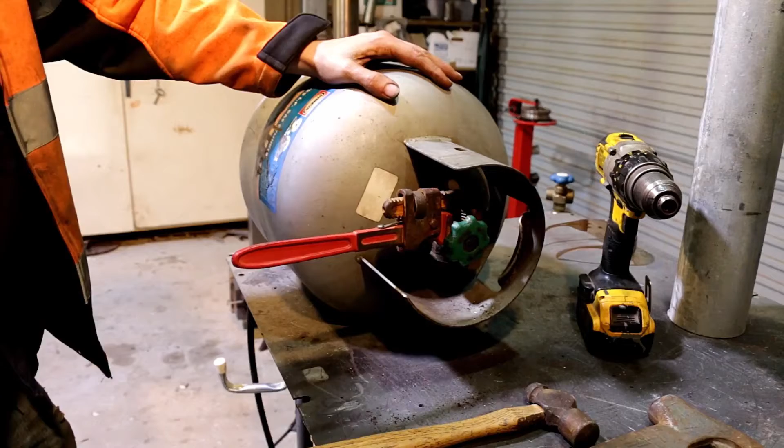Anyone would think they were going for like a gas-tight seal or something, eh? Like a glove. Anyway. Oh folks, it's not looking good. Actually. So if at first you don't succeed, destroy all evidence you ever tried.

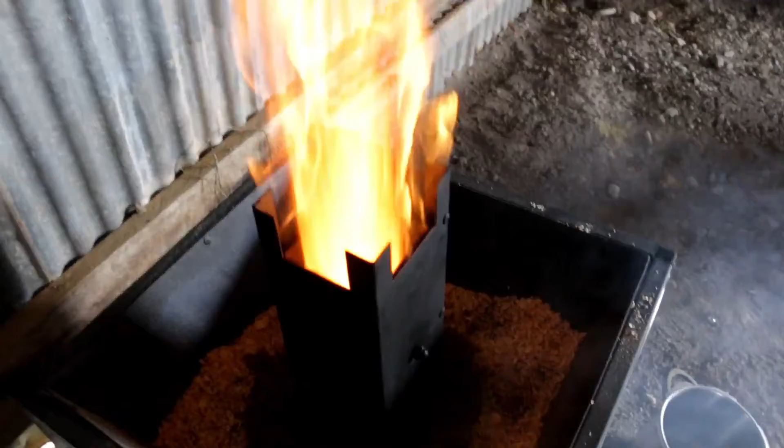Hi. So I have an interesting challenge ahead. Challenge for me because I really want to weld, and I'm putting a restriction on myself that I can't. Basically to put myself in the shoes of people out there who don't have access to a welder or simply haven't learnt the skill yet.

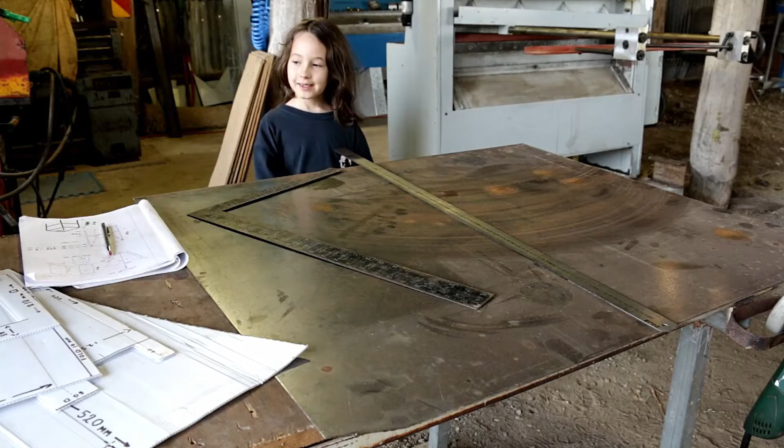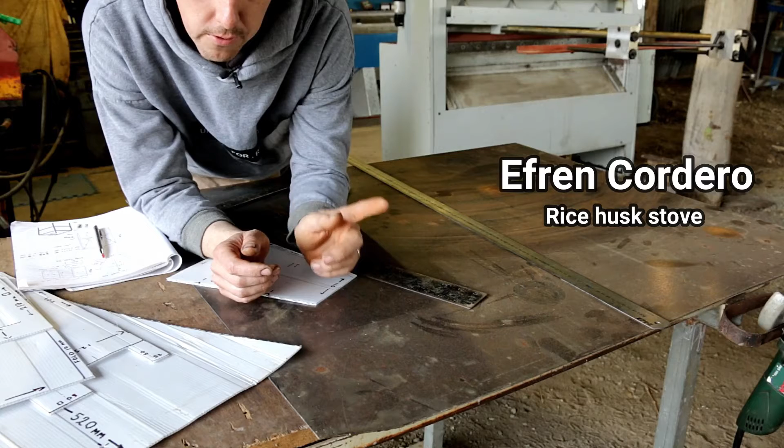So what I have, so I've drawn something up in the computer, and I cannot take any credit at all for this design because it's actually, let's turn this around so I can see what I'm looking at. This design was made by another bloke on YouTube whose name I cannot remember off the top of my head, but I'll put his name there. So check this guy out. He's the original bloke who made this stove.

When I sort of had a first crack at this and fell flat on my face, I'm like, okay, let's go out there and see what works. And so I came across this design, and I really like it because I think I'll be able to not just burn rice husk in it, because rice husk for me in Australia is basically a non-event. It's not something that I can find readily available, and I think that's the case for most Australians.

But something that is available is other forms of biomass, like sawdust. I'm going to try burning sawdust in it. If I can get my hands on some wheat husk, I'd love to see if that would burn in it. But anyway, so a huge part of this build are these templates.

What a template allows you to do is to basically build something before you've built it. See how it fits together, make adjustments, because it's a lot easier to work with this, and less expensive than to go cutting this up and wasting it.

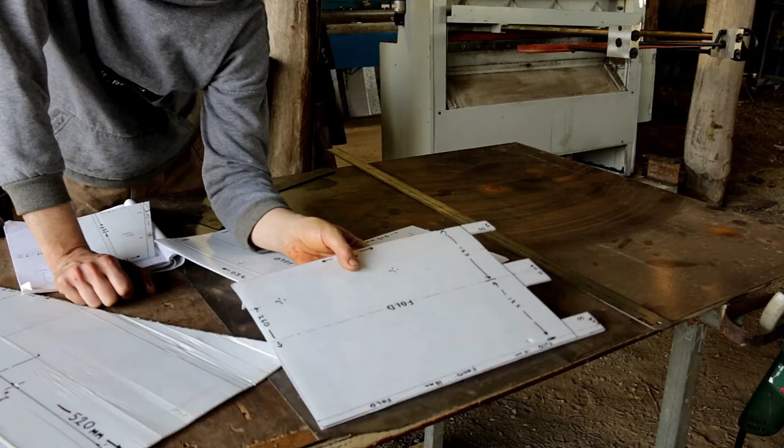So the idea of a good template is it gives you a better feel for your layout and your material use. So I can lay all my pieces out on this piece of steel and get the maximum usage out of it. It also means that it's repeatable, and if you want to make more than one, you've already done the hard work and you can come back to it. There's nothing stopping a person from scratching out these dimensions straight onto your steel. That's fine. But if you ever wanted to do it again, it's worth making a template.

I've used Corflute, and this has given me an advantage in that I've been able to work out where a lot of my holes and things are drilled, and lay parts on top of other parts, line up my centers, and punch through. And it will hopefully save me a lot of mucking around as this build progresses, and enable me to put this together easily.

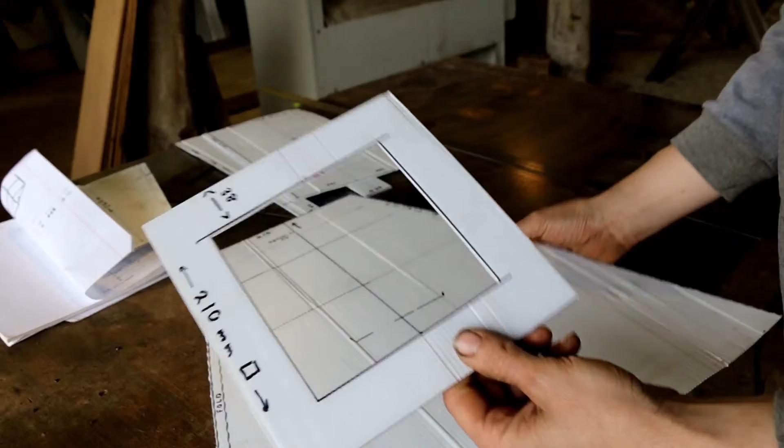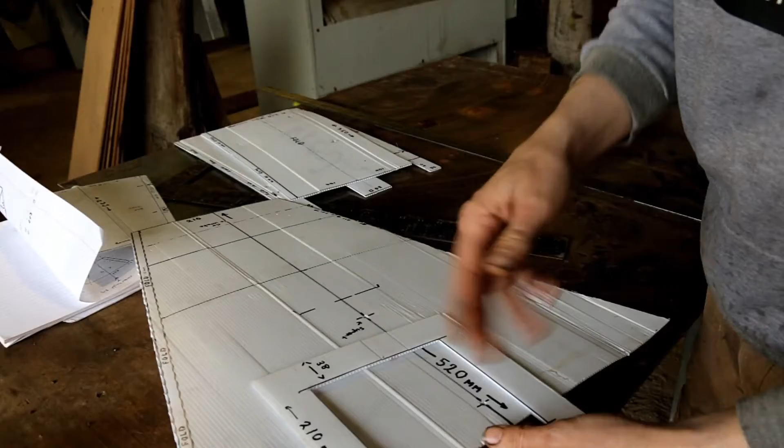So I'm going to leave some detailed pictures of all of these templates for you, so that you can pause and get the measurements off them and write those down. All the measurements that are on these templates, providing all your lines are square and parallel, will enable you to recreate these templates quite simply. Just follow the measurements. I always start with a center line and then work out from there and make sure that everything is square to my center line. And that's the easiest way to work this stuff out.

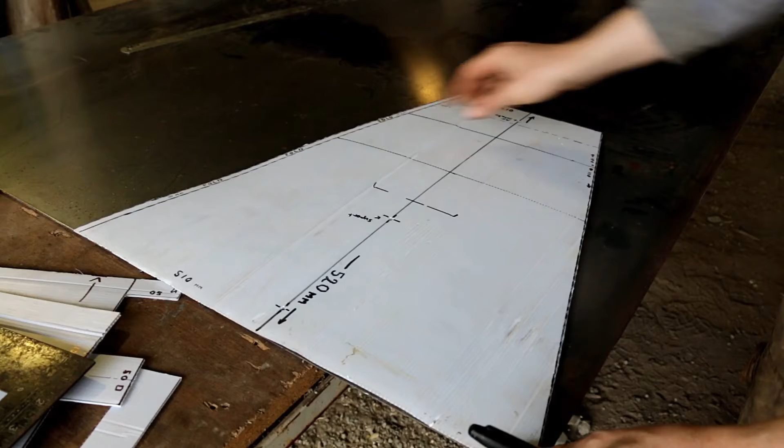Okay, so this part makes the main body that will be the outer part of the stove, the bit you see. And you need 4 of these pieces, and it contains a fold, a 10mm fold. And there's also a hole down here for the air intake. So now is a good time to scratch these holes in.

Now, a grinder will make short work of this job, but a guillotine will make shorter. And that's why I'm using it. If you don't have a guillotine, don't worry about it. It's not essential. A grinder with a slitting disc on it will be just fine.

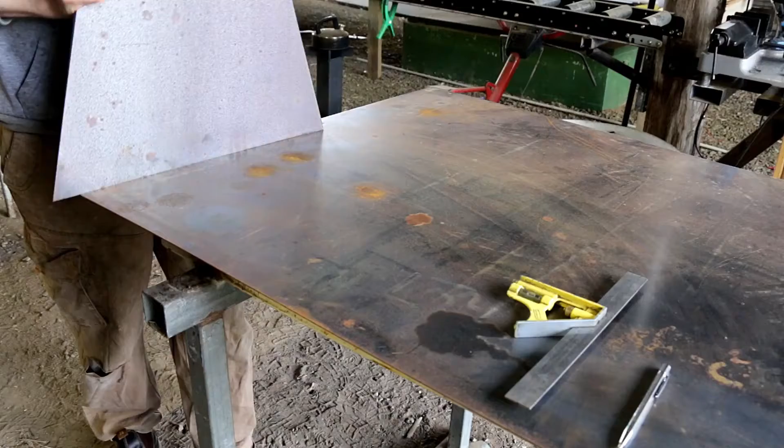There's the body. Now, this is the first mistake of many that I make on this build. Basically, I go ahead and fold all these parts up now, and I should have left them flat, clamped them together, and drilled all my holes. Everything would have been the same. It would have been much easier to keep everything aligned, but, you know, hindsight.

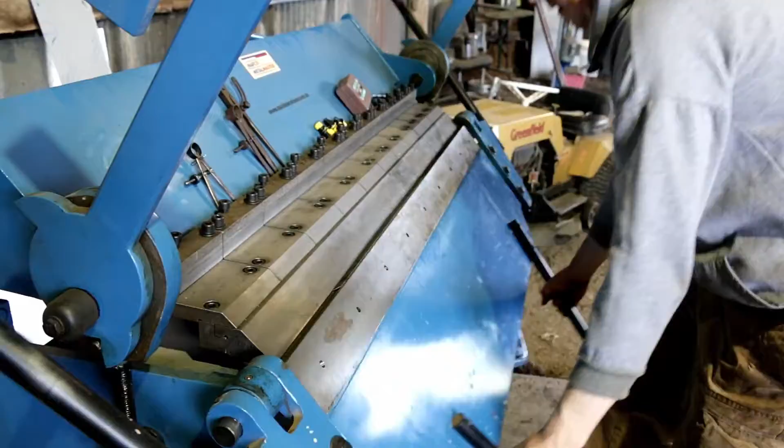Now, I am aware that most of you out there watching me don't own a folder or have access to one, and it's okay. You can still achieve all this by simply scoring the material with a cutting disc. Lightly just grind all the way along the fold mark, not all the way through, but just weakening it to the point where you can put it over an edge and hammer the fold. It's actually quite simple. It's a little bit time consuming, and that's the only reason why I'm not doing it, is because I have a folder and I would be crazy not to use it.

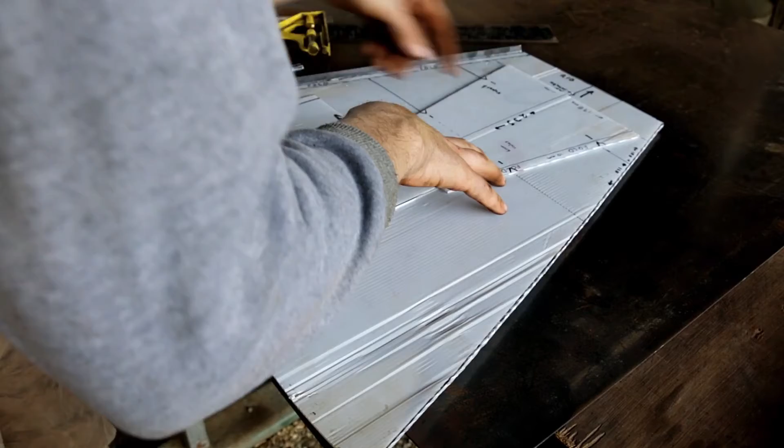That goes there. That goes there. Yeah, so in between those two. So between this line and that line, you need to drill a bunch of holes. Now, if I had actually done that, drilled between those 2 lines and not accidentally gone up to the next line, I perhaps would have ended up with a functional stove and not a blast furnace. Just making that observation now while editing. To let air come through.

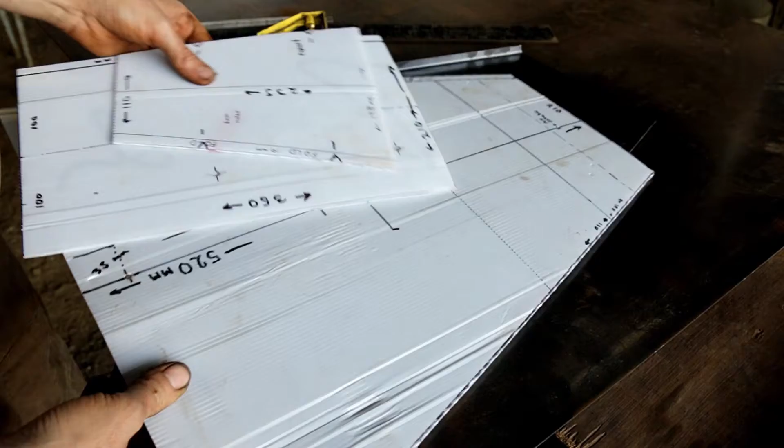And now a little time-saving trick is clamp all your material together, just like this, and drill through all of them at once. They're all going to be uniform that way, which also means if you stuff up your pattern, you're going to have a uniform stuff up. All I can say is that if you're not familiar with your drill before starting this job, by the end of it, you will be quite intimately acquainted with it. Over 180 holes here. I had blisters upon my blisters.

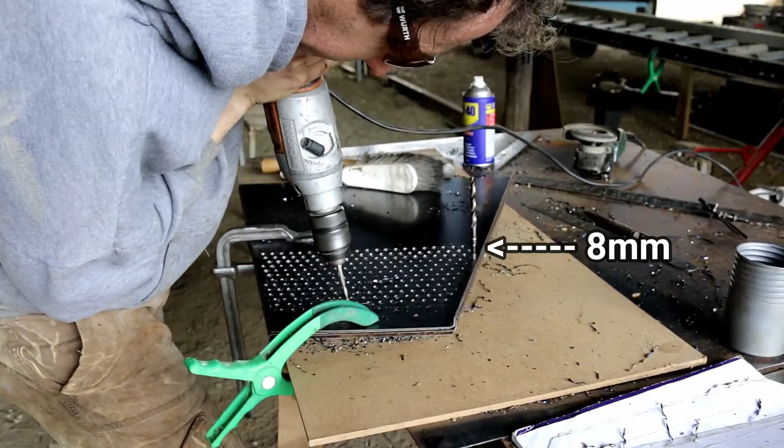The first 3 layers of holes from the top were 8mm. That got a bit hard, so I switched to a 5mm drill. They're all 15mm apart on a 15mm grid, and basically that's all you need to know.

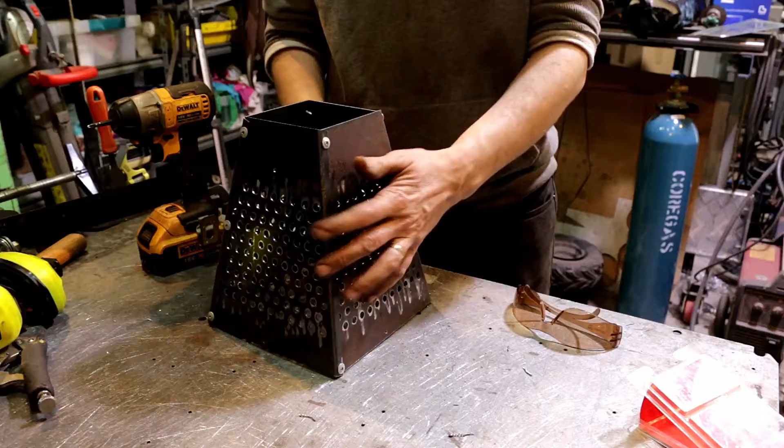Now, the burn chamber is basically identical to the main body, except this time I did it right and I screwed them all together before folding. The hole pattern is again a 15mm grid, and the holes in this one are 6mm, and I screwed up there. Jumping forward in time, this is what the burn chamber looks like once screwed together and everything done. I've misplaced the footage of me doing that, so I'm just inserting this from the future.

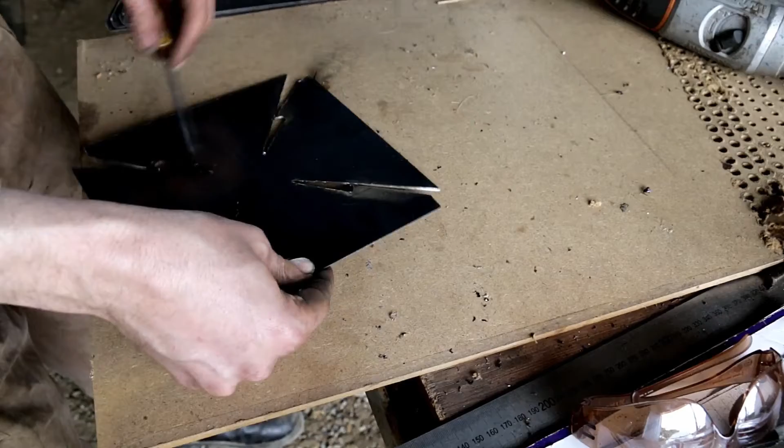Once you've cleared out these areas, you can then use the grinder to score your fold marks, remembering not to grind all the way through. You just want to weaken the material so you can bend it by hand or with a hammer or whatever you've got available at the time. And there you have it, as easy as that.

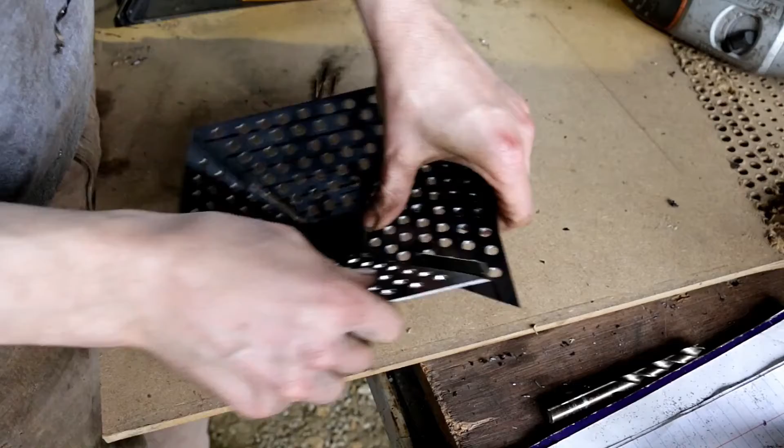Now all the holes in this plate, ashtray, are 7mm, and I didn't mark out any of the holes. Basically, I just started in the middle and drilled 3 and then went a little bit down and drilled 4 and just kept incrementally increasing the hole numbers until it was all filled up. I was sort of over center punching and scribing at this stage. Once you're happy with it, you can screw it together.

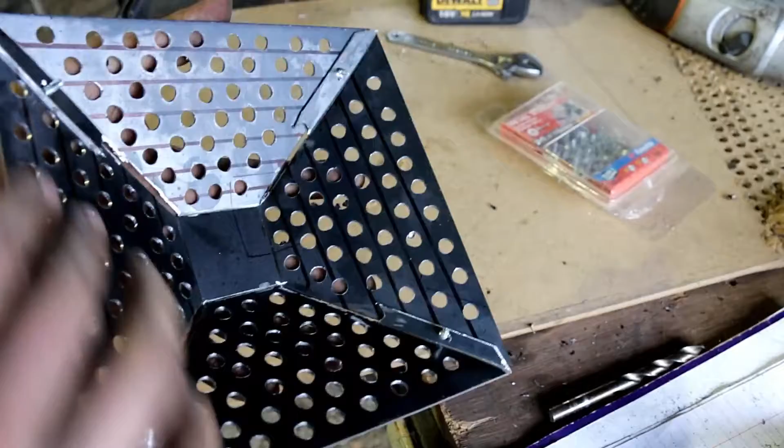This part really needs no explanation. Yeah, it's really that simple to make.

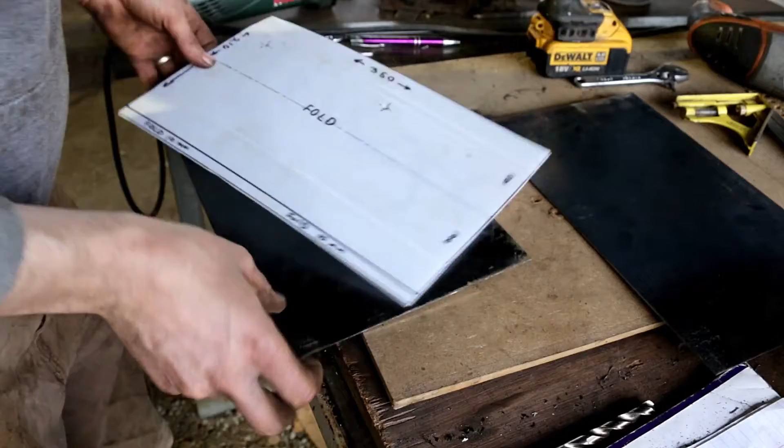Now we're getting to the meat and potatoes of this build, which is the inner riser. You need 2 of these parts, and you'll need to drill some holes in them to accept some 3/8 threaded rod or whatever you have handy. I used 3/8, so these 2 holes were drilled out to 10mm. Try to be as consistent as you can. It'll just make things go together smoother later on.

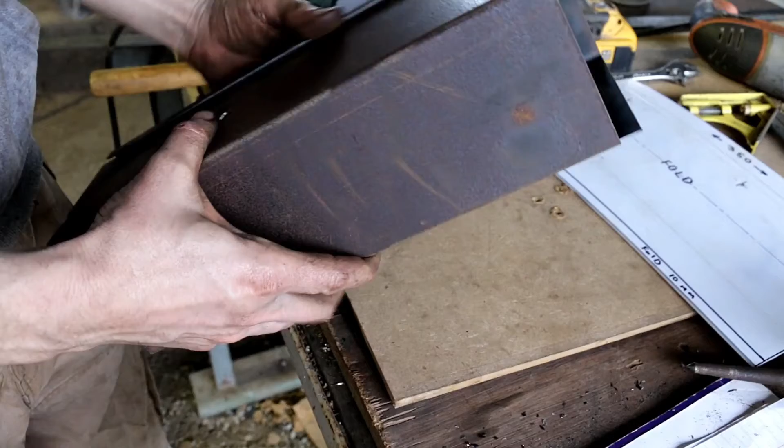And make sure your folds are 90 degrees, like really try to be accurate. It'll make the assembly of these parts so much smoother as the build goes on. You won't be reaming out holes with a drill, and it'll save you a bit of time mucking around. That'll get screwed together. Let's move on.

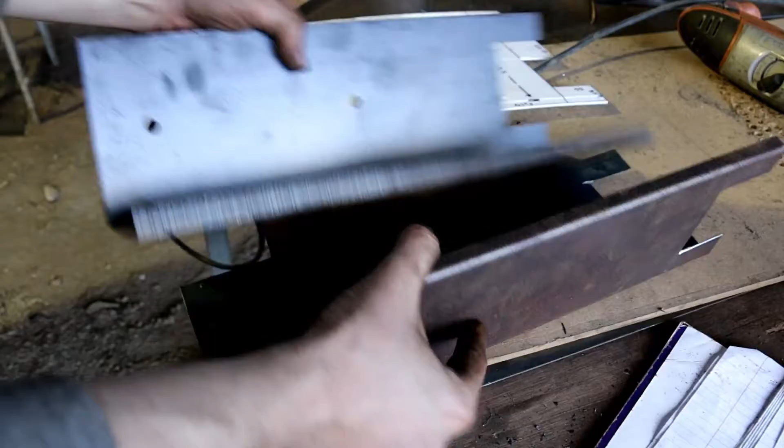Now the outer halves of the riser are basically identical to the inner halves. They're just a little bit larger so they fit around each other. That's what they look like when they're all cut out and drilled. And this is what the part looks like completed. Again, accuracy and care taken when building this will be rewarded with an easier assembly. So, yeah. These parts are now ready to be screwed together. And yeah, let's keep going.

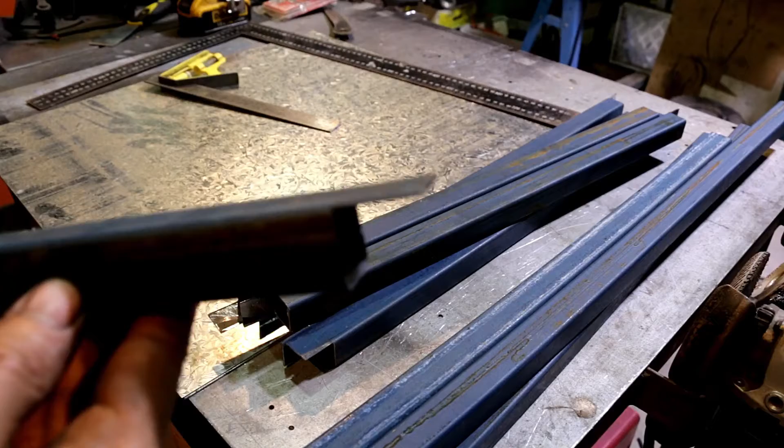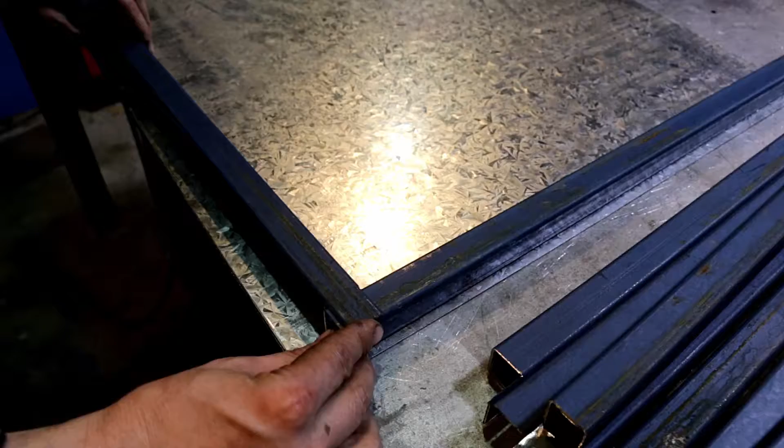Now these are all the bits for the frame. They're the support parts for the legs. And they're the only bits you'll need to notch. The notch is just a 25mm, leaving that little bit of a tab on the end, so you've got something to screw to. And it's really a simple process of putting it together. Just get it square. It's very useful to have a clamp to sort of hold it in position and just screw it together with self-tapping metal screws. It's easy as that.

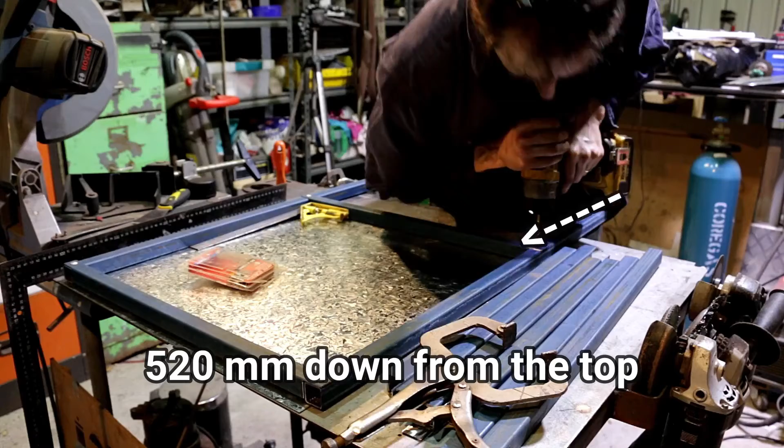And repeat. Providing all your pieces have been cut to the same length, this should be very straightforward. The support bar that I'm screwing in now is 520 mil down from the top. That's measuring from the top edge of the frame to the top edge of the support. And now we repeat the process again.

I'm being lazy here and using the first frame that I made to mark out the position of the support bracket. Probably not the best practice, but at least that way if they're both wrong, they're both identically wrong. To hold the whole frame square, I'm using this 0.3mm galvanized sheet.

And I love that noise. Can't help myself.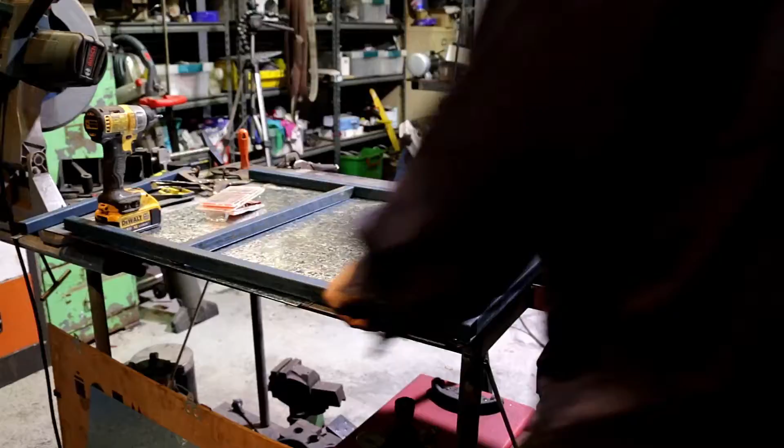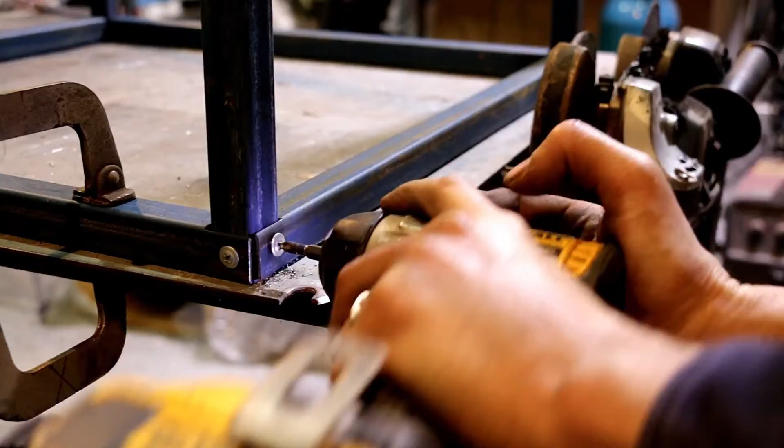Once you have your two frames made, you can screw the remaining support brackets in and turn the whole thing into a box. This is probably the fiddliest part of the whole arrangement. Again, a clamp is really a necessity for making this a simple task. I need to get the bench flat. There we go. This is where a second person would have been handy to sort of help hold that up. I managed to get it. And with this final screw, that's the frame done. Of course, it's the hardest one.

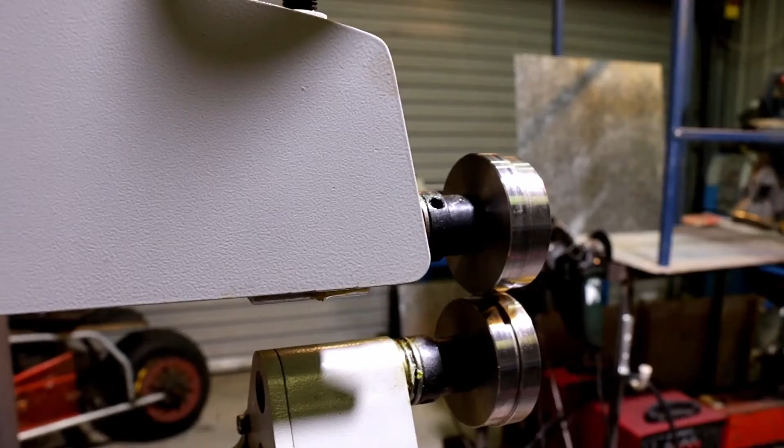And there's the frame. Now what's going to hold those legs parallel with each other is going to be the sheet metal. And I'm going to put some ribs in that now on my Jenny to strengthen it and take that wobble out. This is my Metal Master Jenny, or bead roller as they're also known. And it's the newest addition to the workshop. I'm still sort of getting used to it, but man, I've only ever used the hand-powered ones in the past, and this thing is just luxury. So nice.

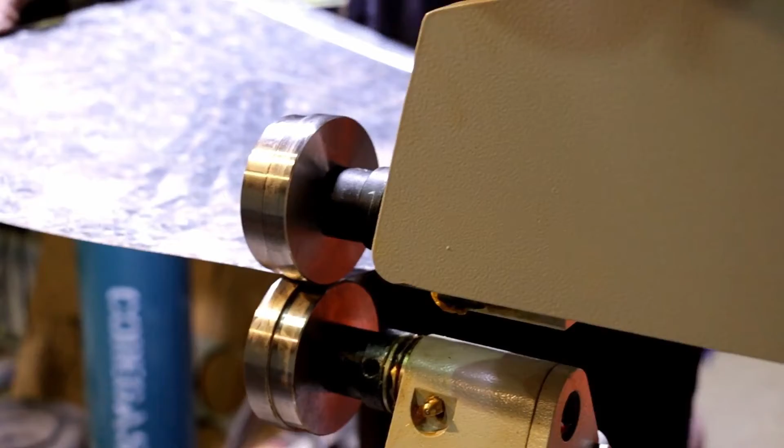All up, I made 3 of these parts. These sheet metal covers also work as windbreaks, and you really don't need to use what I'm using to do this. I did consider screwing corrugated iron onto the side of it, but I sort of wanted a more attractive stove, and I had the gear to do that, so, you know, any excuse to use a new toy. But you could use corrugated iron, you could have used fibro cement sheeting, obviously non-asbestos. Anything that's non-flammable would work really well to brace the frame and provide a bit of a windshield.

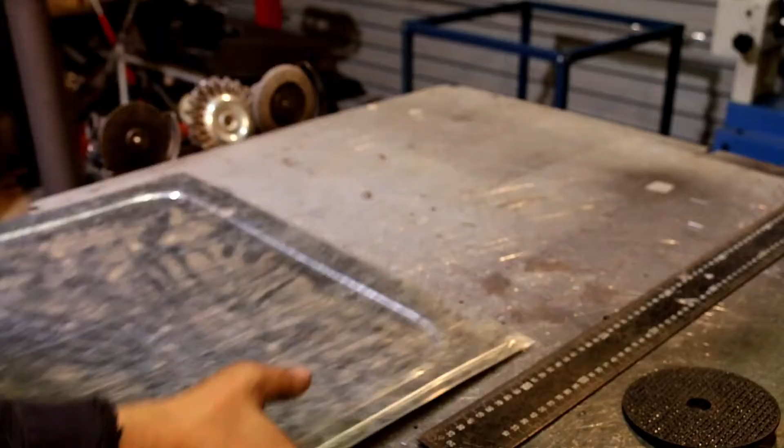By just putting a few creases in the sheet metal, it's made it quite rigid. It's still got a little bit of flex to it, but it's taken all that wobble out of it. No more wobble.

Now at this stage of the build, all you need to do is screw one of these sheets to the back of the frame. Just pick a side and tack it on. You're going to need access to the rest of the frame for the remainder of the build because you're going to be screwing stuff in. So yeah, just get one on there. It's going to hold it all straight and enable you to keep going.

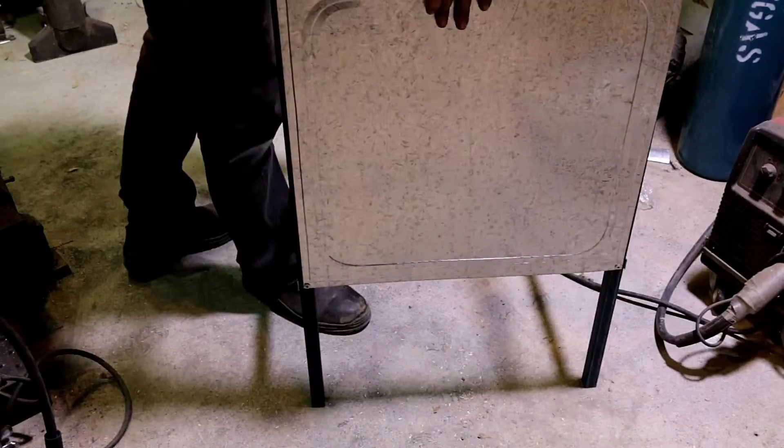Now that the frame's assembled and standing, we can move on to the assembly of the actual stove. We're going to start with the main body parts, and what I'm doing is making sure that these air intake pipes fit through the holes that I've drilled down the bottom. The holes that you're seeing there are marked on the template.

I've used 25 NB, which is nominal bore pipe, for my air intakes. The pieces are 130 mm long, and I used a 24mm hole saw to cut these initial holes. Normally a hole saw will cut slightly oversized, and I was sort of hoping for a nice tight fit.

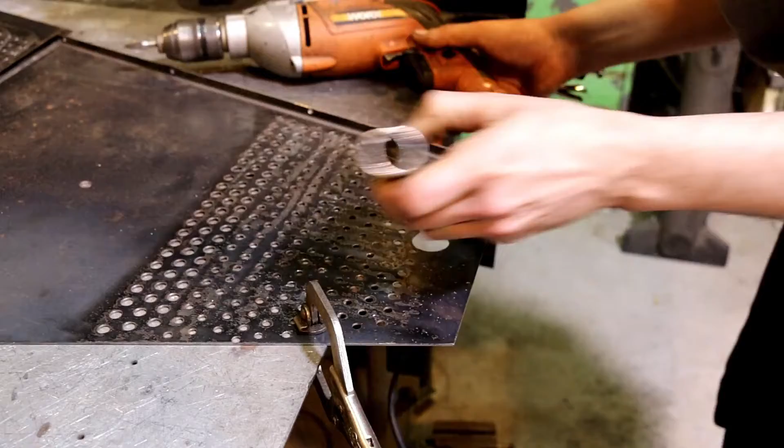And as it turns out, the hole saw cut a perfect 24mm hole, which is really annoying because now I've got to open them all up again. But that's okay. It means that each hole I will be able to guarantee that it's a nice slip through fit. You don't want it too loose, but you do want it to sort of stay there like that.

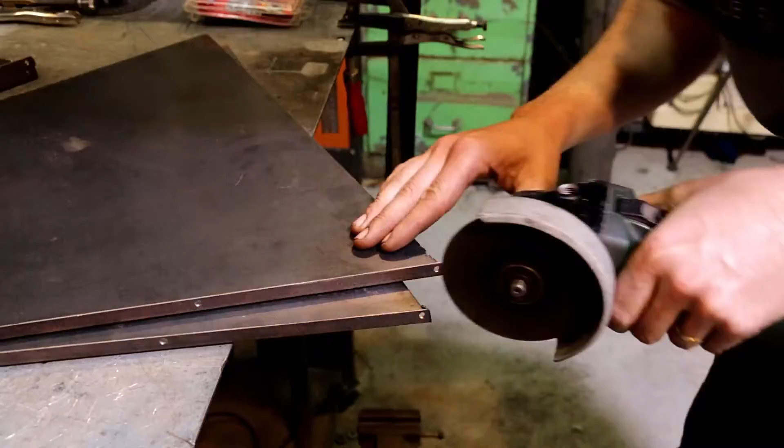Now when I got to this stage of the build, I realized that these folds had a little bit of a part of the lip that protruded past the top, and that would prevent me from getting the whole thing to sit flat when I screwed it together. So I'd quickly knock those off with the cutting disc so that when I assembled it now, it's sitting really nice and flat on the bench, which is kind of important.

And it's just a matter of screwing it together now. I pre-drill holes in the fold just to sort of make this task a little bit easier. I'm only using 4 screws per side.

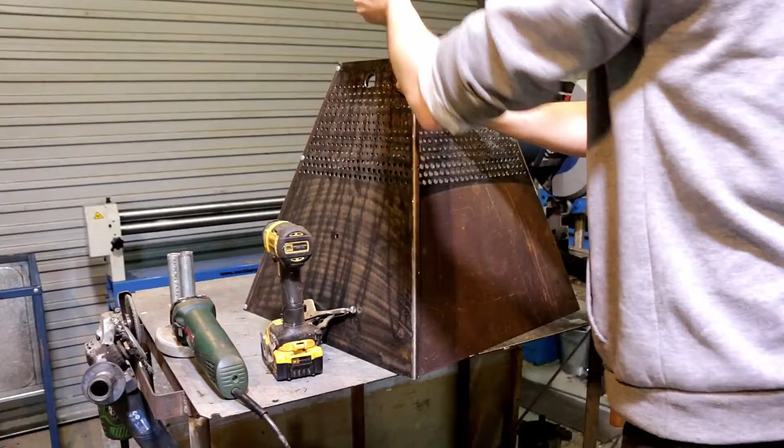And if you don't own a clamp, you should really get yourself one. I named mine Jed. Jed Clamp It.

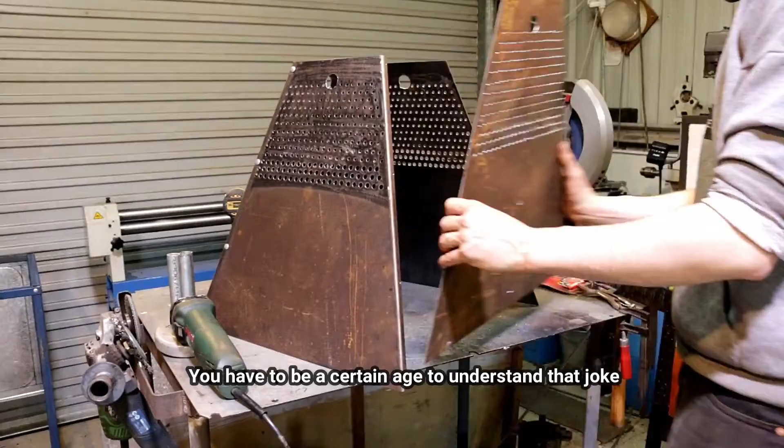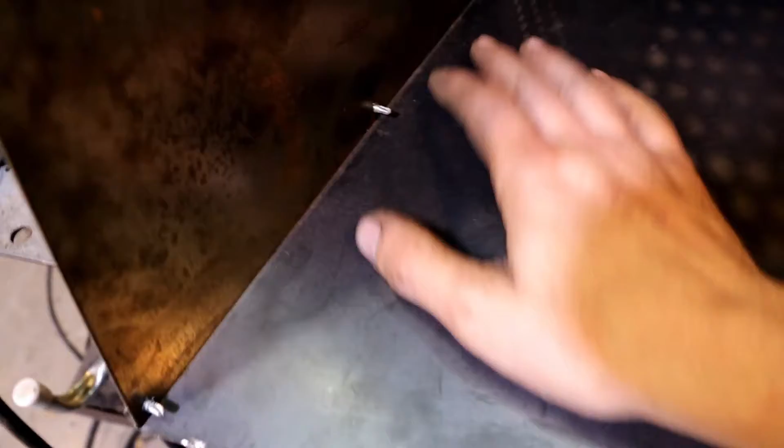Now because fuel's going to be flowing down through here, I'm going to be chopping off the excess screw that's coming through. I'm just going to do that with the grinder really quick. And that's just going to help prevent any bridging of the fuel as it works its way down. And it shouldn't affect the holding strength of the screws.

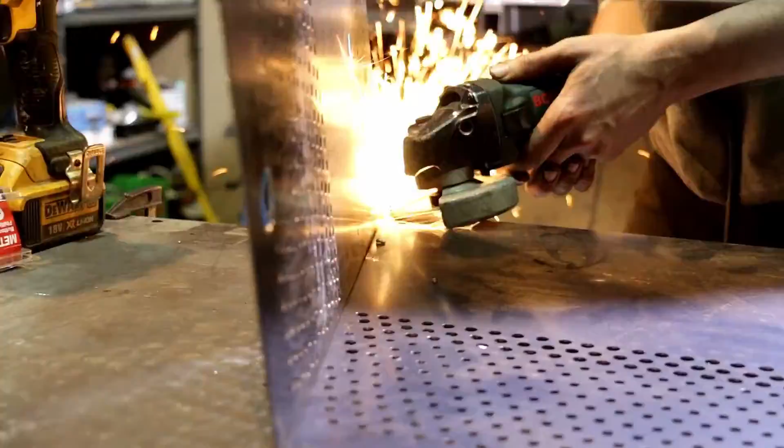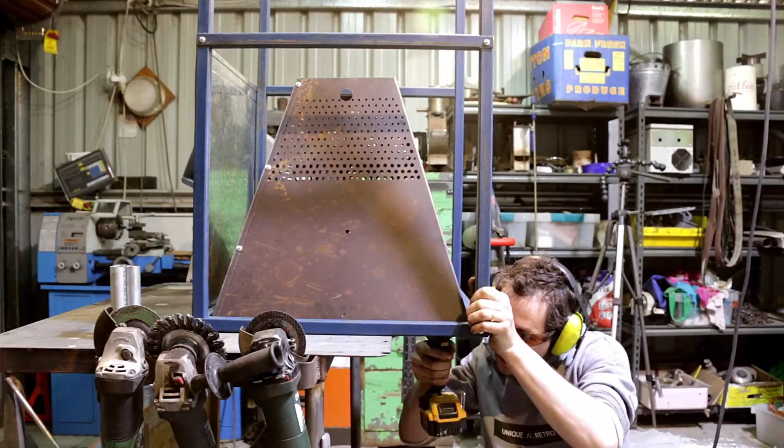And now we're finally getting somewhere. If I can get it in. There we go. So flipping the whole thing upside down just gives you a nice flat base. It's going to keep everything in line. And just pull it out a bit from the edge so you can get access to the main body to screw it to the frame.

And to begin with, all you're wanting to do is get enough screws in there just to hold it in position so that you can flip it then the right way around and put the rest of the screws in. I'm coming in for a better shot so you can see what I'm doing now. There you go.

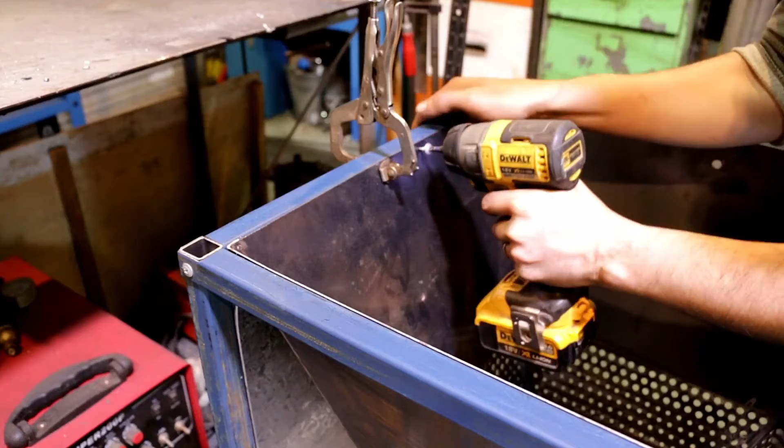I'm just starting to get a real sense for how big this thing is. It actually stands very tall in the saddle, and it's fine for me because I'm like 6 foot something. But you might want to consider making the legs a little bit shorter. And just tap it in, Happy. Just tap it in. And there we go.

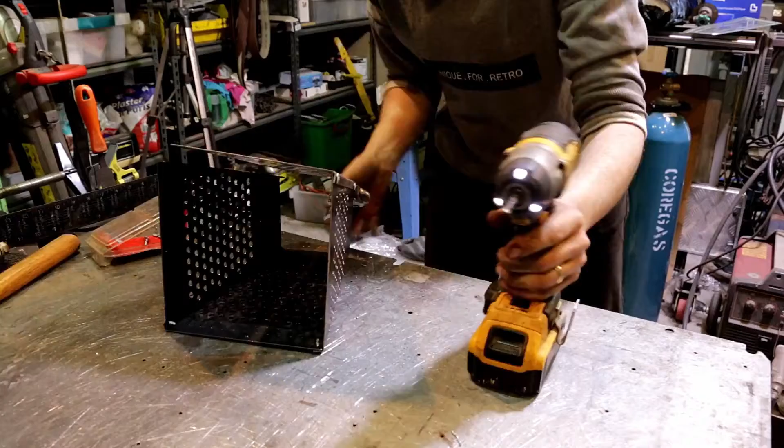Now we get to assemble the inner burny bit. These parts you can just screw together however you like. I've used 3 screws per panel to hold it in place. That seems to be working just fine. You don't need to trim the screws off on this one because there's no fuel going to be flowing down on the inside. There's just going to be fire racing past it. Okay.

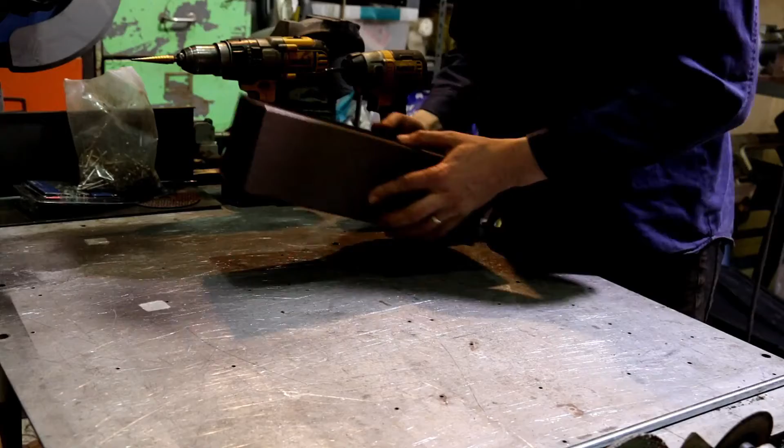Now these 2 parts, once screwed together, create the inner part of the riser. There are 2 holes drilled in each part which will accept some threaded rod. And that's just going to help align the inner and the outer part together. I'm pre-drilling the holes here just for easy assembly. Now, I also deburred the back of those holes off camera just so that the fit was nice and tight. Pre-drilling those holes just makes the whole assembly task so much simpler.

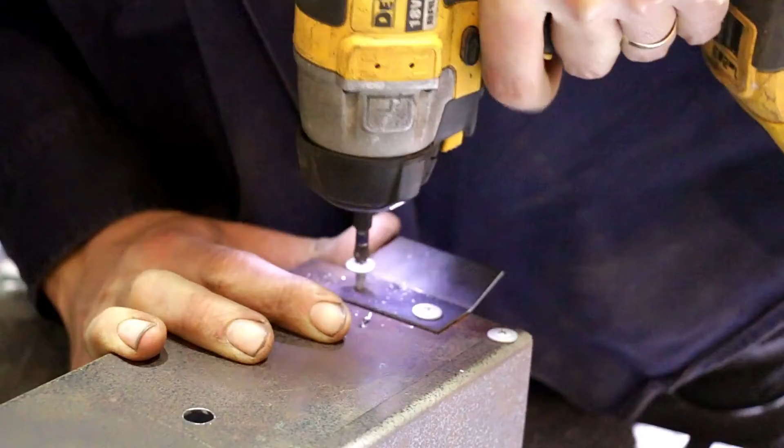And that's that. Now these tabs are what connect the burn basket to the riser. I made those off camera, but they're very simple. They're only 50mm squares with a fold down the middle. I overfolded these parts and I ended up having to tap them back. So they really need only the slightest kick in them.

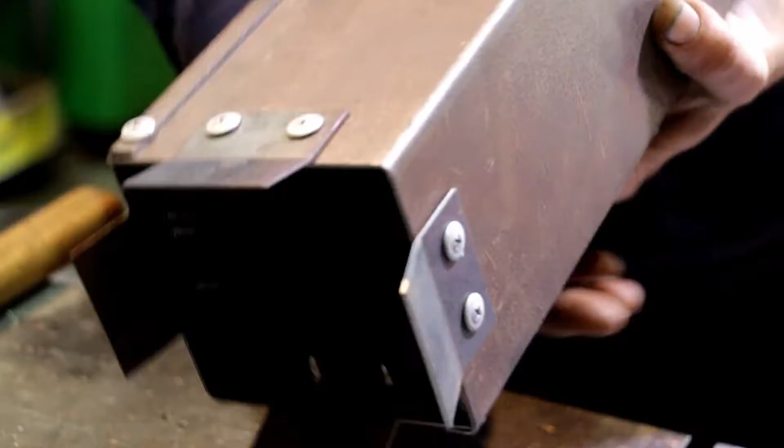Have you finished yet? No? A few more taps? It's not quite perfect? You're a perfectionist, Chook. It's never going to be perfect.

So now for the secondary, third-andary, fourth-andary, I'm not sure what you'd call this, but they're air intakes and they're an essential part of the design. And they just fit through those holes nicely. They're the ones you saw me opening up before on the body.

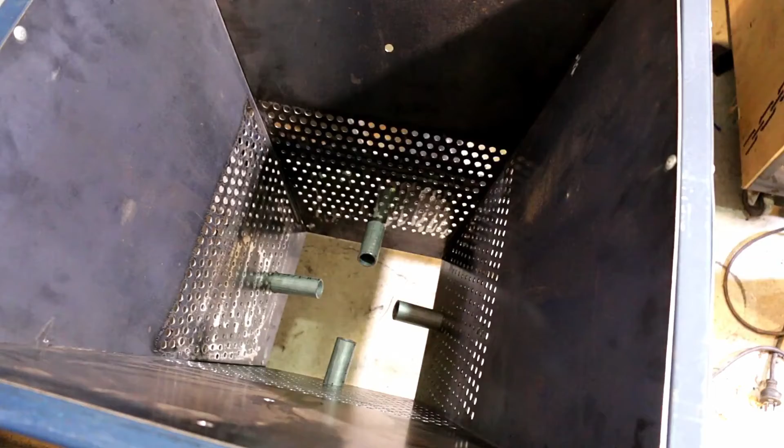Now, in order to hold these into position, I'm going to have to get a little bit creative because I'm not using a welder. What I'm actually going to do is mark their position once I'm happy with them with a Nikko. I'm just doing a quick test fit with the basket now, just to see how it sort of sits and check gaps and sort of visualize where the fuel's going to be sitting and have I got enough room. And it's just a sanity check.

So I'm going to be marking it with a Nikko, a permanent marker, and then drilling and using 2 nails as like dowel pins on either side of the material to hold it in position. Another simple way of doing it would be to use 2 pipe clamps on either side. I think stainless steel would be the go if you were going to use pipe clamps, but for me, nails were sort of a simple low-tech way of holding these pipes in position, and it worked quite well.

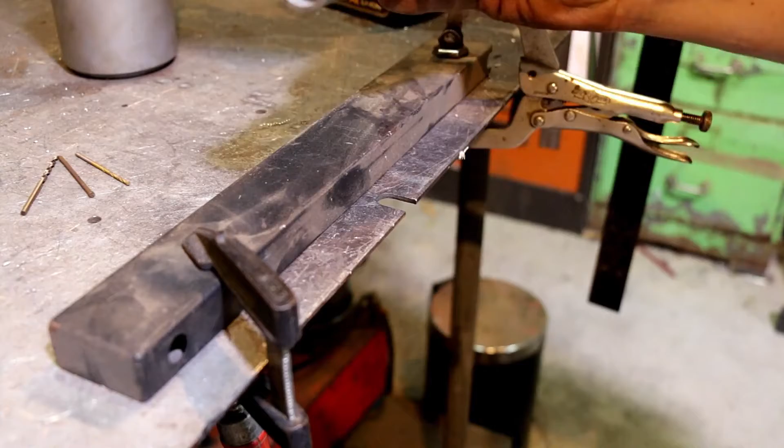So the holes you see me drilling here are to accept 2 nails that will be 90 degrees from each other, and they are going to be what holds these bits of pipe captive. So if you can imagine, 1 nail on the inside of the stove and the other one rotated but on the outside of the stove, sort of sandwiching the steel in between. It won't be able to go in or out. It's important that you drill a hole that is a good tight fit for the nail or whatever you're going to use. This will all make sense in a few minutes when you see it installed in the stove.

And now basically, with 1 nail already installed in the pipe, we just slip it through and fix it by nailing the other one from behind. And that's quite firm now. It's really not going anywhere, and we just repeat that another 3 times, and that'll be all the pipes installed. And that's what it looks like from the back.

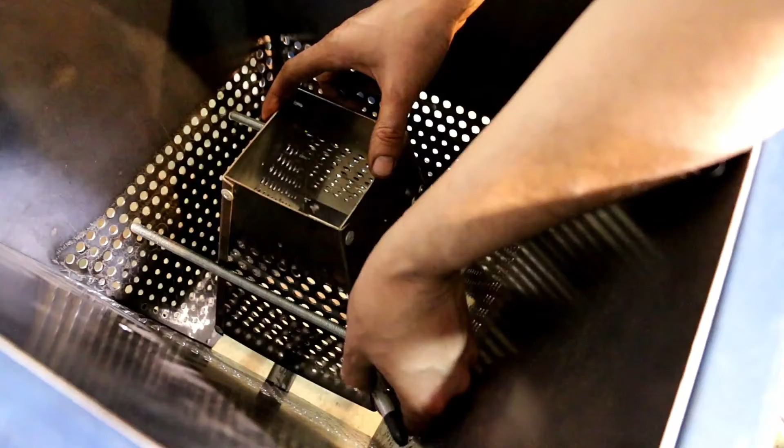Now what you need to do is work out roughly where your threaded rod's going to sit. I just sat it all in there and marked it with a texta, and then came out and drilled and tapped the holes to accept the 3/8 rod in this case. This is the rustiest 3/8 tap on YouTube. There it is. Just a quick test fit. I'm having to hold the tap on a bit of an angle so it all sort of lines up and goes through. It's a bit ugly, but it works.

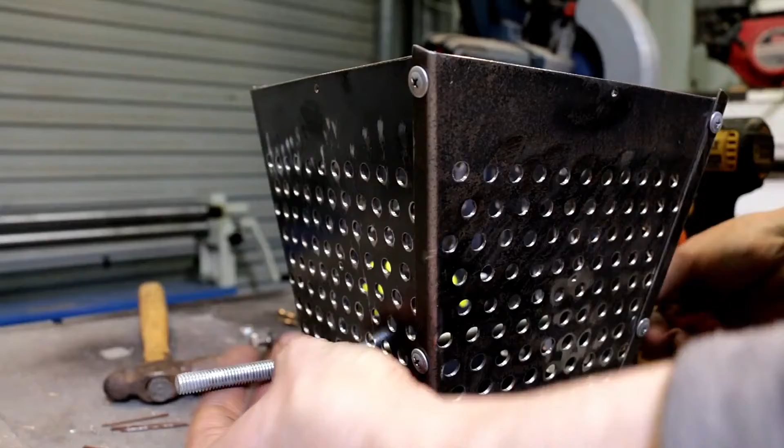And using the drill just to run that threaded rod in, oh, time saver. Be there for hours twisting it by hand if not.

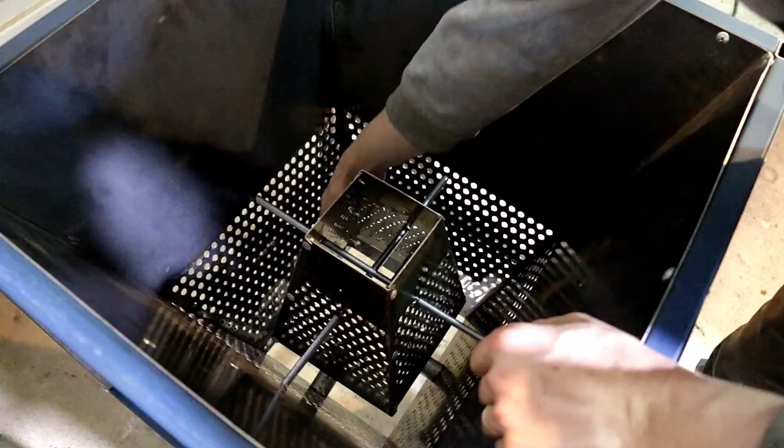Okay, so the fit in there was really quite good. Potentially I could have notched these so that they fit inside some of these holes, but that is just pressed in there, and the pressure of the walls pushing in seems to be holding it there quite nicely. And we'll see what happens when it gets hot, how much these bow and carry on. But the gap's nice and even around the bottom. It's sort of what we're looking for. We're minimizing snagging points that would create bridging with the fuel.

And I think I'm going to call that done for now. And of course this is just sitting down on those air intake pipes, which are sort of even. If you have a look down in there. That's what we're going for.

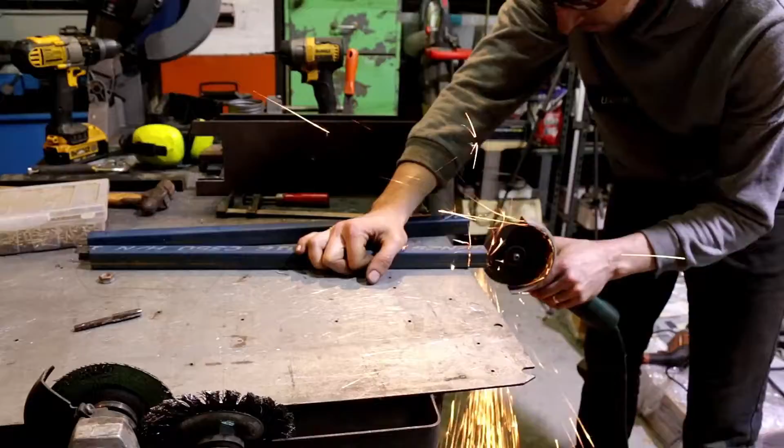Now the bits that you're seeing me make here, you will actually have already made. I gave you the correct number in the cut list way back yonder when we were talking about the frame. So I just sort of messed up and skipped a step. So anyway, I've made that right now. And to work out the position of the ashtray support, which is predominantly what these two bits do, hold that in position. Just put it all where it needs to be and mark it. I'm just lining it up with the body underneath, and that is all there is to it. It's a very foolproof way of working out its position.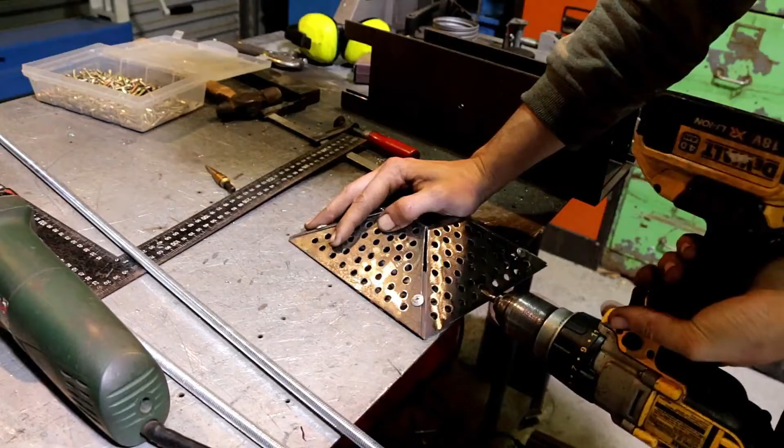I need to attach a bit of rod to this before I throw it in there. Just drilling and tapping some holes to accept the 3/8 rod. What I'm about to do with this tap is a little bit brutal. It's a good thing it's imperial and not metric. A metric tap would have folded in seconds. Oh, it's brutal. Gives me chills just watching it now.

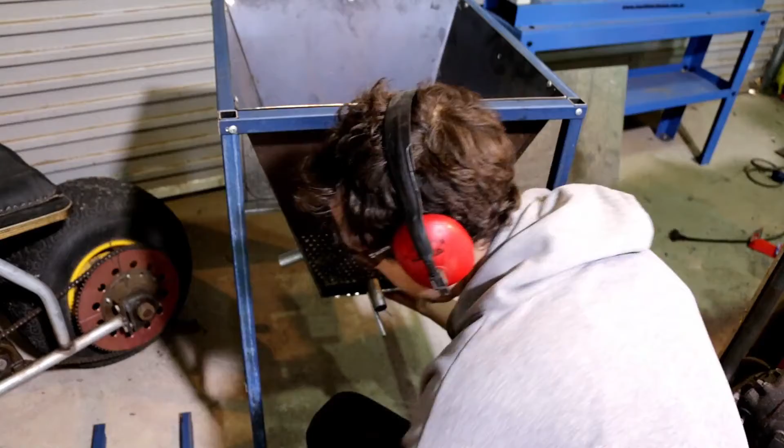The only thing I need to point out here is make sure that before you install the support, you put the ashtray, or jiggler as I'm calling it, in position. Otherwise, once it's all together, it ain't going to fit. I'm just doing a test fit. It jiggles nicely.

So there's really not much left to do now. I'm screwing the internal riser onto the internal burn plate, I guess that's what I call it. And pretty much it's just the final assembly and a splash of paint, a few little things, and this is nearly ready to go.

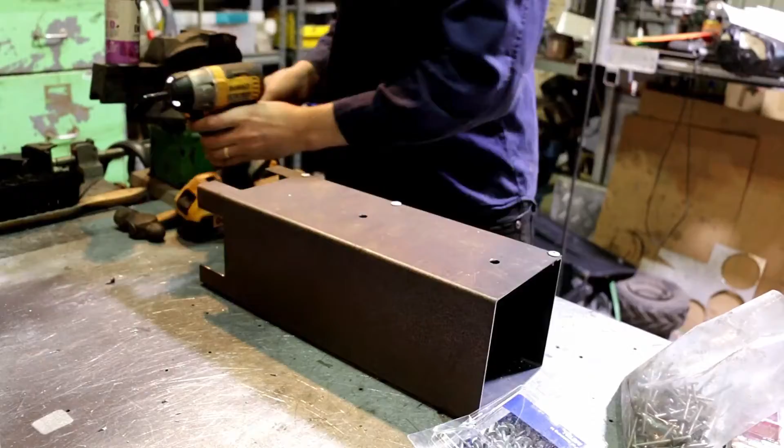So the outer riser's job is to separate the fuel from the inner riser, basically to try to get it away from the heat so that it doesn't catch fire before you want it to. And unfortunately, it didn't really do a good job. I needed to pack insulation in there, either some rock wool or make a base to cap the bottom so that you could fill it full of ash or perlite or whatever you've got, sand, just something to prevent the heat from radiating through and catching the fuel on fire before you want it to. The whole stove would have ran so much nicer if I had done that.

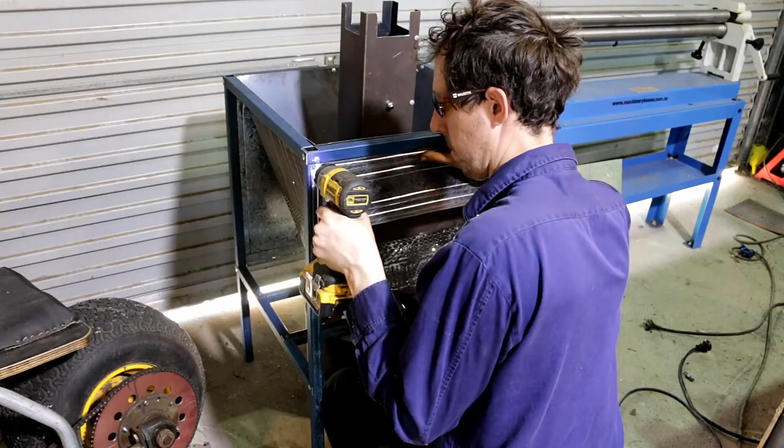The last of the finishing touches are pretty straightforward, and I didn't bother recording them. I screwed the rest of the panels on and gave the whole frame a lick of paint. Final step for me was to just put a bit of wooden dowel on this threaded rod to act as a bit of a heat shield. And we are ready for a test run.

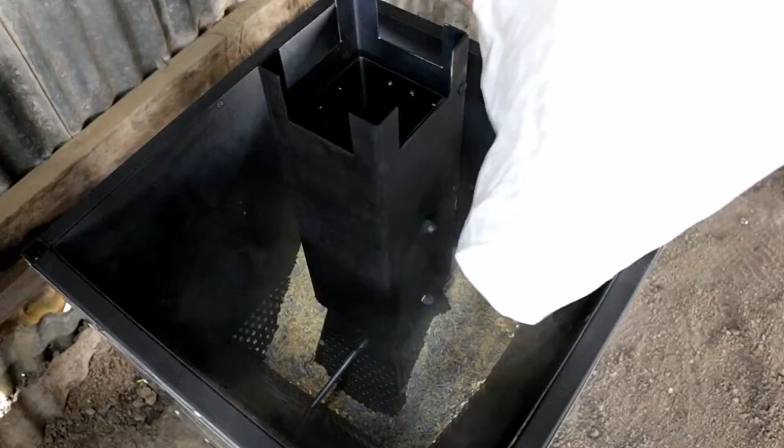So for this test burn, I unfortunately didn't have a whole lot of rice husk left from the original build. I wasted a lot of it trying to get that other stove to run. So to make up for the lack of rice husk, I've mixed in a bit of paper kitty litter with the rice husk, and now I'm topping it up with sawdust. So I really need to get some more rice husk, but the stuff is really expensive.

Something that I've come to realize with you guys is you don't turn up to see my awesome fashion. It's about the stoves, it's not about my fashion.

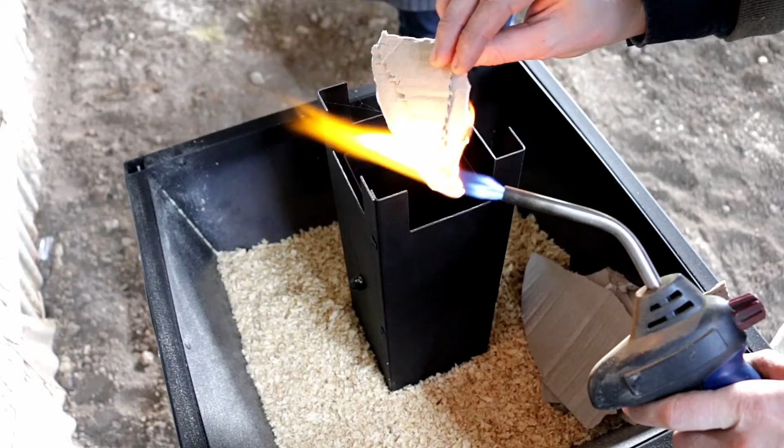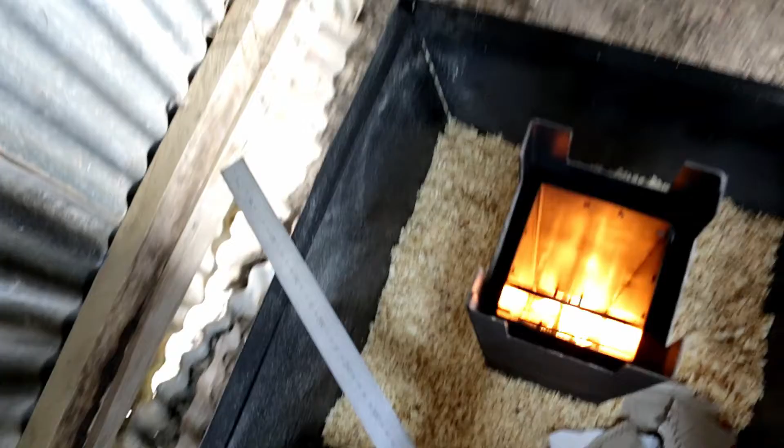Anyway. Lighting the stove is fairly straightforward. You just get some cardboard, set it on fire and drop it down the tube. And help it down because there's lots of threaded rod and obstructions, but you know, just get it down there and it'll get going. Oh, instant fog. There we go. I think that's starting to take now.

I'm not particularly well known for my fashion sense either. No, we're a perfect couple.

I think that's actually going now. Wow. Oh, wow. Okay, this thing is going nuts. Ooh, all right. Nothing in this pot. I just want to see what happens when you put something on top, whether or not you get a lot of... No? That's pretty good.

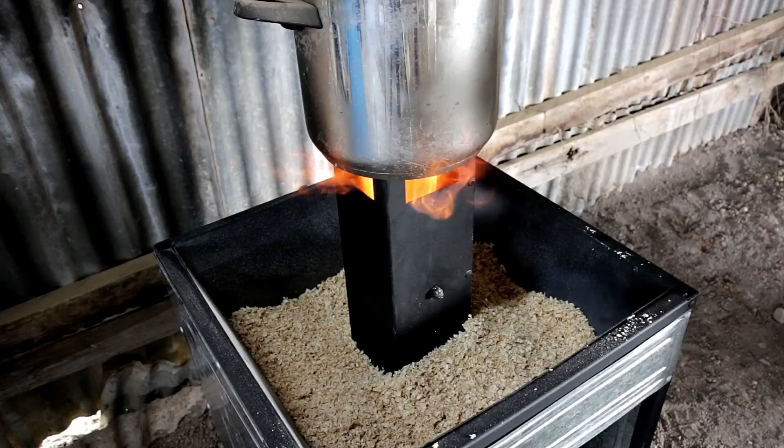It's always that fine balance of... Okay, that's proper nuts. I am literally lost for words at this point. It just kept on ramping up, getting hotter and hotter. I'm like, how is someone supposed to cook on this?

It was around about now I realized that I'd put this thing way too close to that power point. As it turns out, though, it only got warm and I kept a close eye on it and everything sort of turned out all right. But yeah, I had no idea this thing was going to create the heat that it did. I sort of wanted a stove and not a blast furnace, but I'll take it.

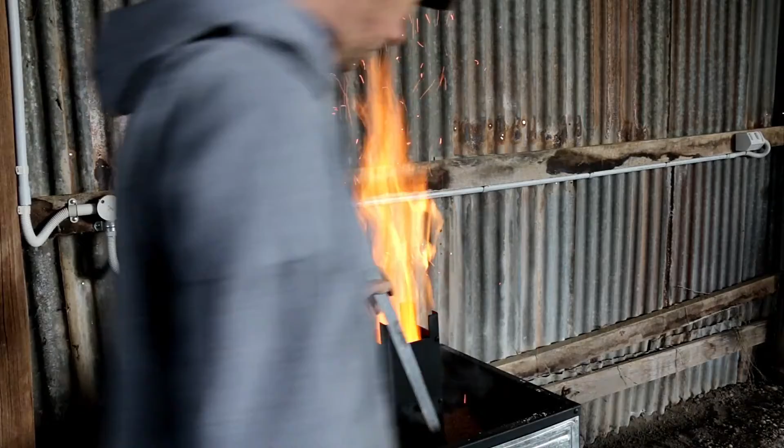Y'all remember that insulation I talked about? I'm starting to see the ugly effects of not having that in there now. The smoke that you see is the fuel catching on fire just because it's touching the riser. Pretty soon it all starts to catch on fire, and this experiment sort of was cut short because of that. And as you can see, also lots of orange sparks now that I'm beginning to run on the sawdust. Pretty much all the rice husk is gone.

But to try to keep things going, I started grabbing dirt and throwing it on top of the fuel to try to smother it out, just to keep it going as long as I could. And that sort of worked, but insulation, perlite, sand, rock wool, something, fibro cement sheeting probably packed down in there would work, just to try to slow down that heat. Obviously, the better the insulation, the less chance this is going to happen. And I need to go back and experiment with that and try to get that right with this build.

I think we're going to call this video part 1. And yeah, in part 2, I'm going to try to fix some of these problems. So I'm really liking the idea of trying to smelt aluminium with this thing. Just got to work out a way to do that.